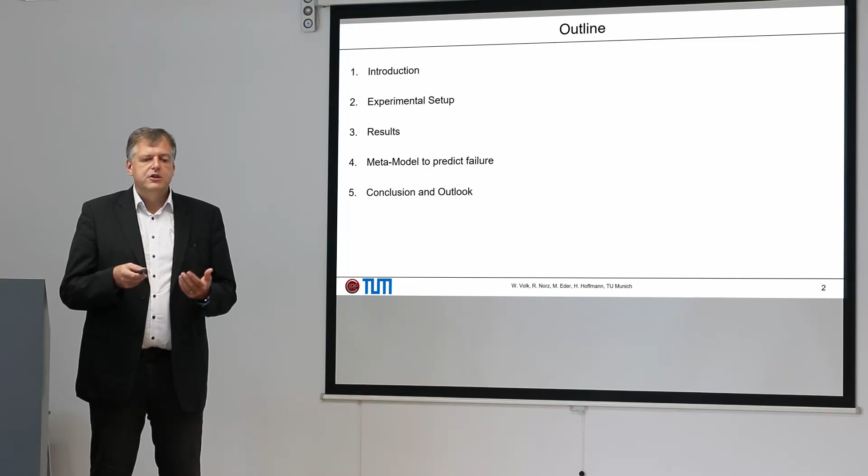Outline is as usual, starting with introduction. Then I want to present the experimental setup, give you some results, and then based on the results, a prediction model also taking into account anisotropy for the prediction of failure with non-proportional load path.

To warm up, we know non-proportional load paths are an important task in the prediction of sheet metal forming simulations. Based on a schematic view for a sidewall panel, we know that when we have ongoing operations like here to here, there can result a non-proportional load path. And we know it's not possible to predict this material behavior with a conventional linear FLC, and we need more complex models which are available.

There can be stress-based models, the EMFC, also our GFLC model, what was developed at our institute and I presented in CIRP Konferenz 2012.

So one topic which is not taken into account so far is the question of anisotropy. We know, based on change in the substructure of the material, that we have anisotropic behavior. We know that we have some different yield strength when changing the loading direction with respect to the rolling direction. So this is one of the main objectives of this work.

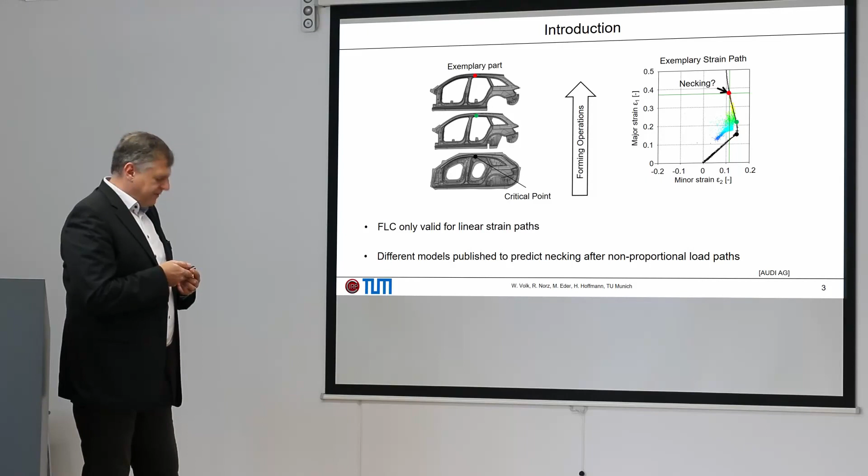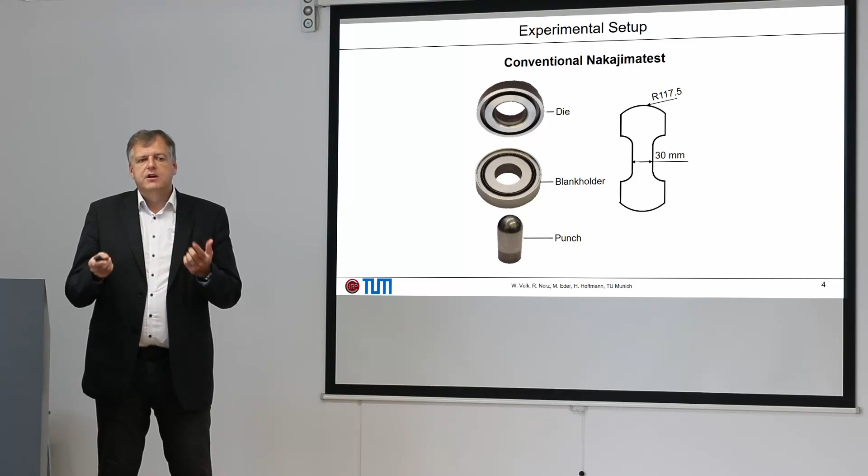Therefore, it's necessary to do some tests, and especially for the FLC, we start with the usual test equipment, this Nakajima test. So we have used the conventional Nakajima test with the die, blank holder, the spherical punch, and you know that it's possible to change the ratio of minor and major strain just by changing the size of the specimens.

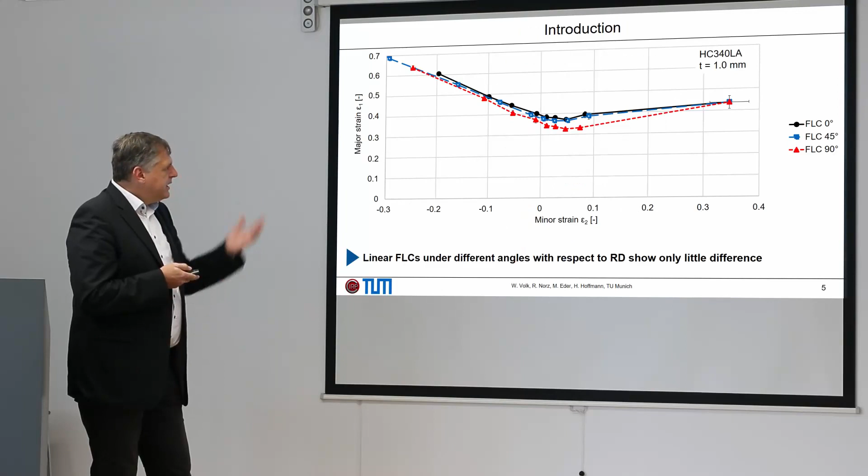Here, for our material, with this absolutely common steel material, a microalloy 340 steel, we know that we have some slight differences also for the FLC, the linear FLC, with respect to the rolling directions.

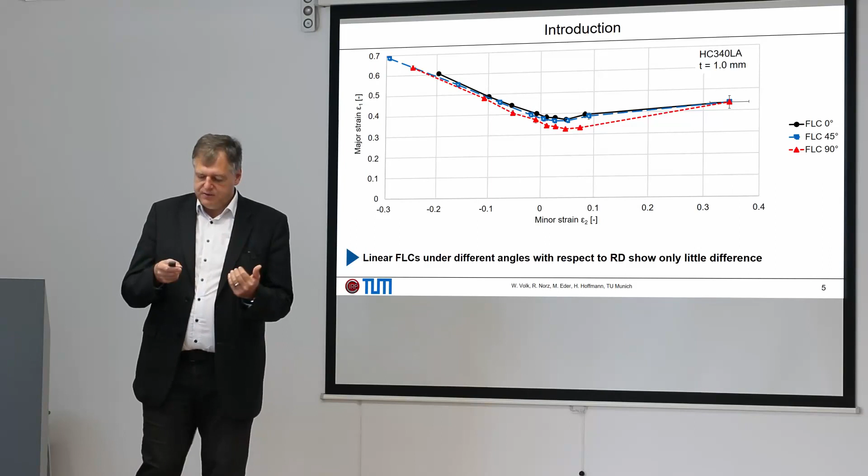Now, as I mentioned some minutes ago, our main goal is to describe the behavior when changing the loading direction within a non-proportional load path. There, it's necessary to have a suitable test equipment to realize this, and this is available at our institute.

It's an oversized Marciniak test, as you can see here, with big dimensions of 1,590 to 1,300 millimeters. And the dimensions are chosen so that even when we have uniaxial strain, it's possible to cut out secondary specimens where we can also totally change it with respect to the rolling direction. Here we see also the names for it.

We have an initial forming step and a post-forming step. And when there is now 0, 45, and 90 for simplicity, I just always mean with respect to the rolling direction. So IF0-PF45 means 0 degrees for the first step and 45 degrees with rolling direction for the second step.

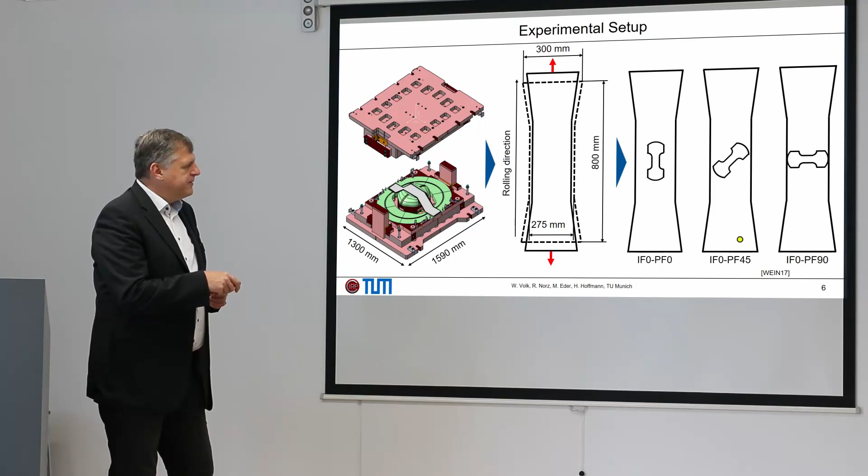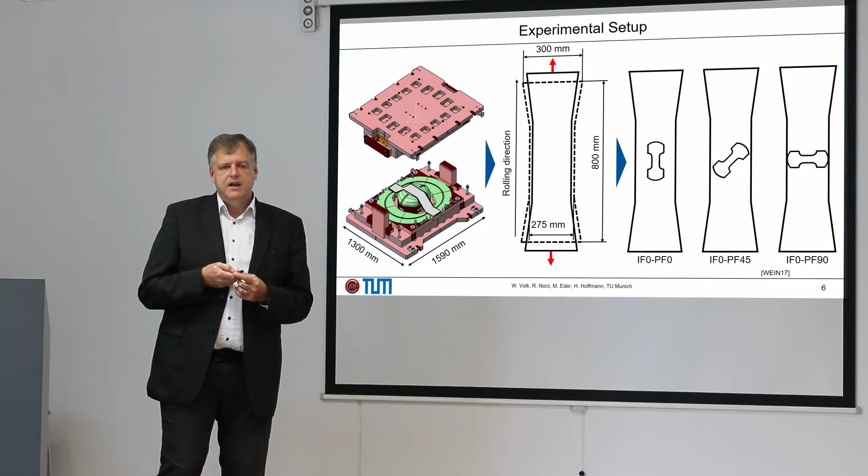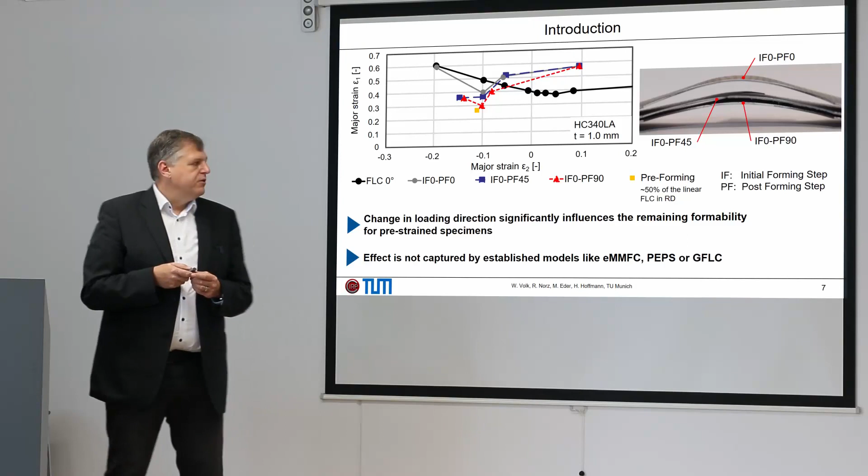So I want to summarize this as the fundamental motivation of the paper: a change in loading direction surprisingly led to a significant influence on the remaining formability for pre-strained specimens. And due to the fact that the stresses are probably the same, we can directly find out that this effect cannot be captured by established models which are published and used, like the eMMFC, PEPS, or also our phenomenological GFLC model. So now we go more in detail.

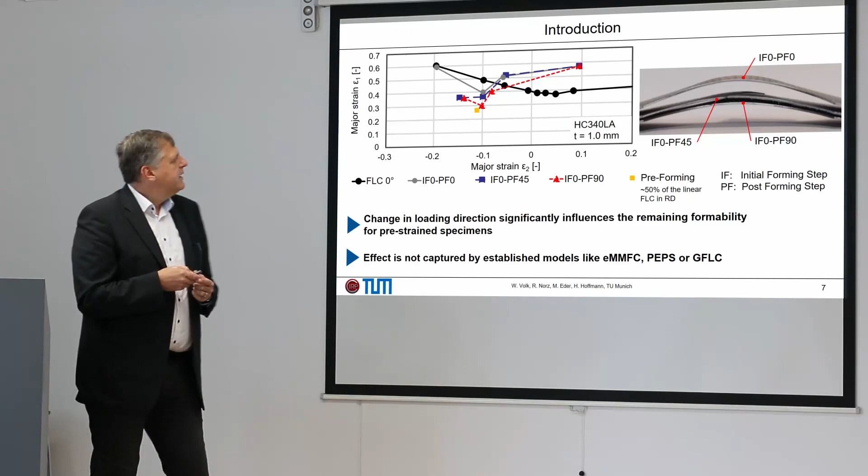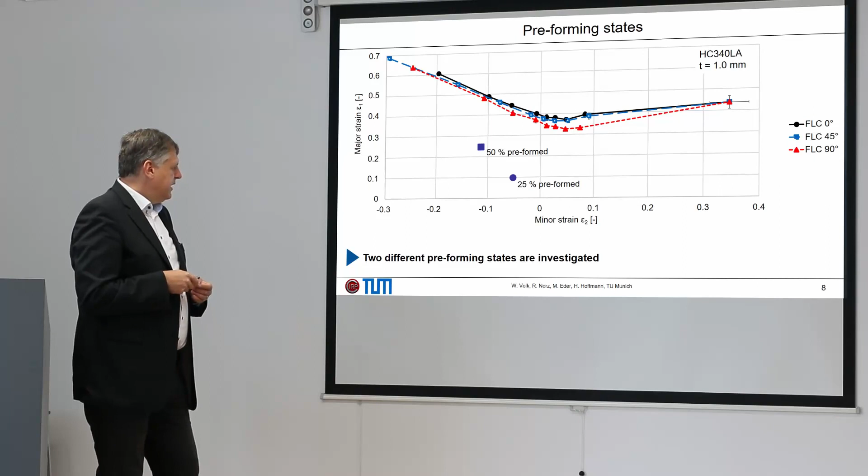For the analysis, we have seen here the 50% preformed, but also we wanted to prove how severe this effect is when we have a reduced amount of preforming, around 25% with respect to the FLC. So we have 2 different preforming states which are investigated in the following.

Here now we see the behavior with 50% uniaxial preformed specimen, 0-0 combination, so the classical one. We see the start of diffuse necking, and then we go to the plane strain behavior, where we know that with this point we have some microvoids which can occur because of the 3-dimensional strain state, and finally we have the start of localized necking starting out of the mid of the specimen. So this is well-known behavior.

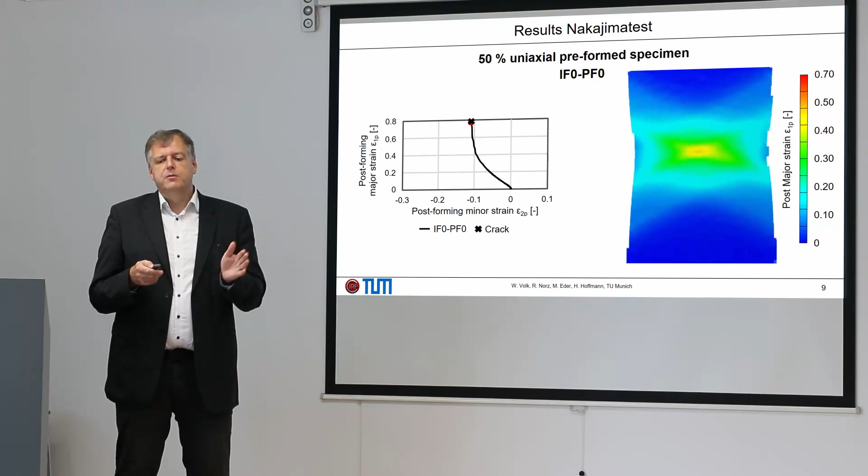And now let's compare with this significantly reduced formability in the 0-90 combination. It means 50% uniaxial preformed, and second step in 90 degrees. It's the red curve. You can directly see here that there is a big difference. When we have a view on the evolution...

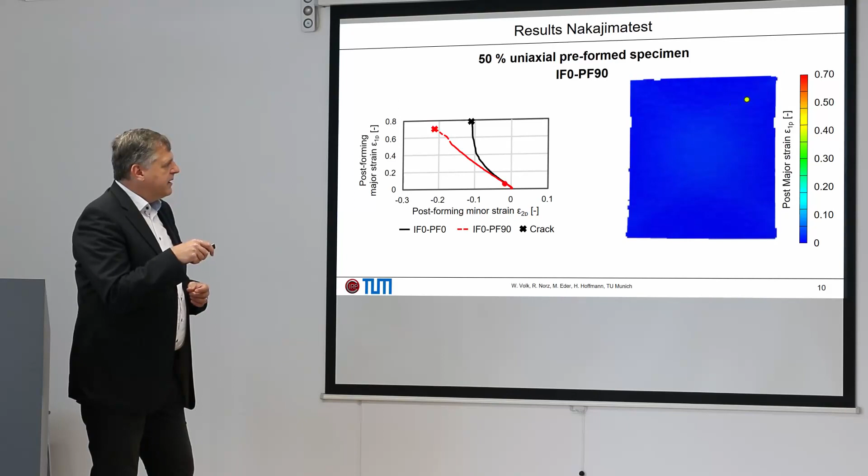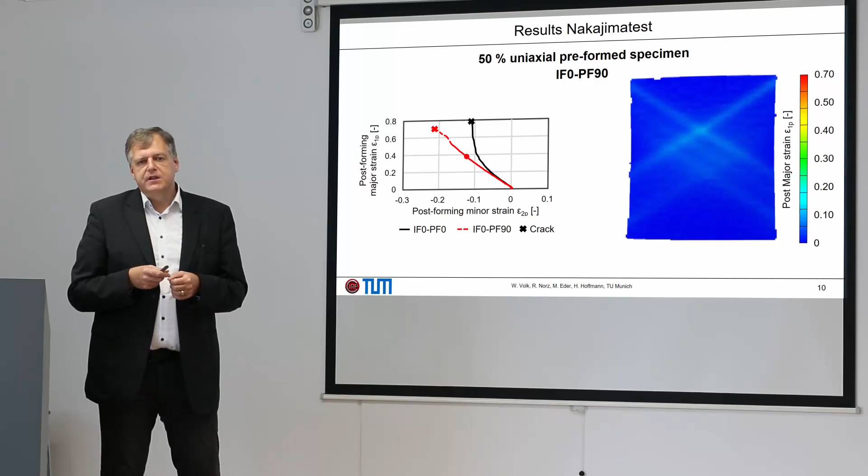We see here this surprising effect that we have some kind of localization in shear direction directly after start of the second forming step. So we see directly no change to plane strain, and like a smooth, ductile shear fracture. So also in comparison to the classical one, no start out of the specimen mid, and really a totally different strain behavior, a little bit comparable to materials with a negative strain rate sensitivity, which is here not the case.

Now, let's compare it also for the second group of specimen, where we have used a preforming step of only 25%. So with 25% preforming, we don't see this effect of shear localization. Always same behavior, start of diffuse necking and then localized necking out of the middle of the specimen.

And when having the big pre-strain of 50%, here also in 45 and 90 degrees, we have the totally different failure behavior. So in the following, we describe this classical one, change to plane strain with failure mode 1, and this ductile shear fracture with failure mode 2.

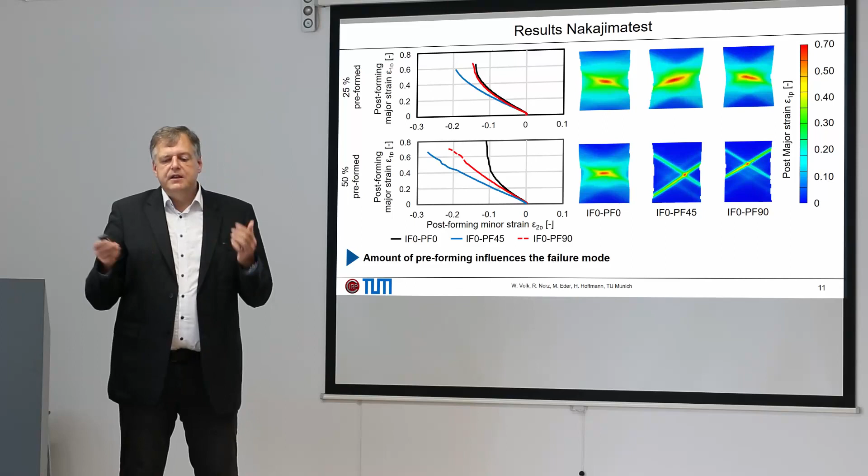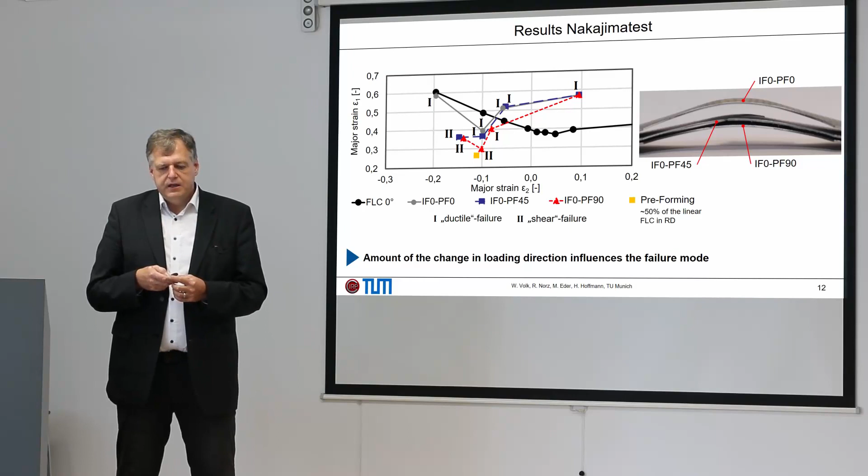Therefore, it's helpful to have a microscopic view in the specimen. And what is done now? Here we see for this 0,0 and the 90 combination, the strain path after the preforming step.

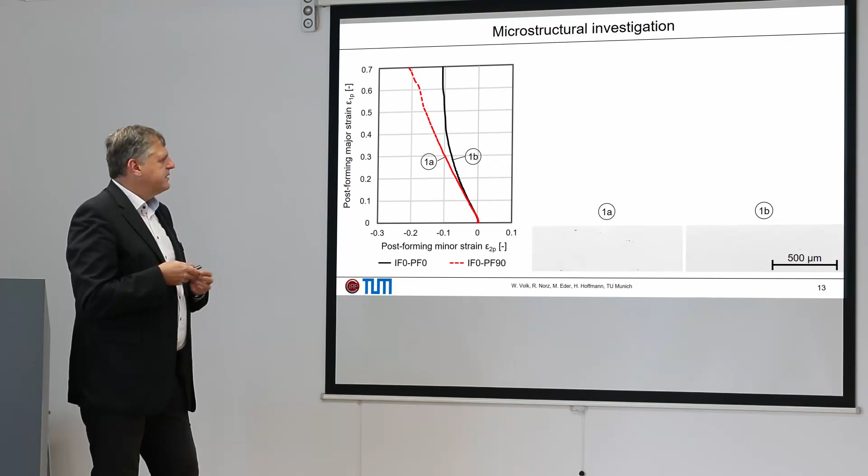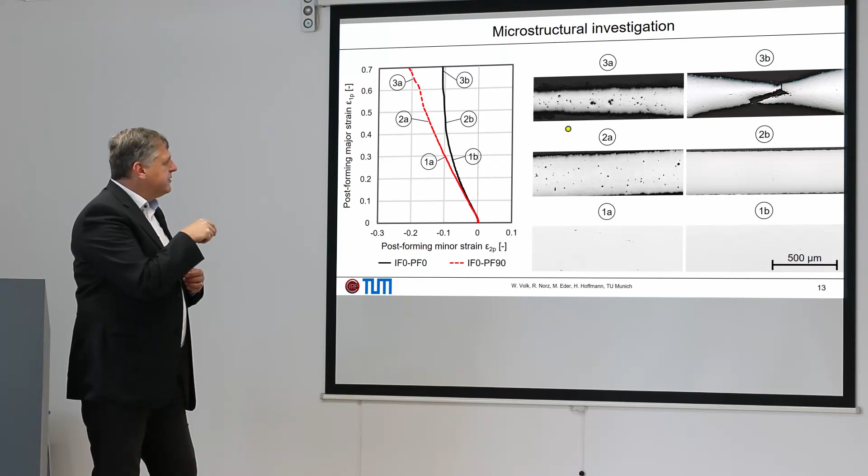So this is a moderate first start of strain. Then we have an ongoing intermediate step, and then finally where we have the failure of the specimen. Here on the right-hand side, conventional view 1B, 2B, 3B, we see nearly the homogeneous specimen. Then after start of diffuse necking, some small voids which can occur, and finally the crack starting out of the middle of the specimen in the well-known representation.

But now have the look on the second curve. Again, only difference, 0 degrees preform and just turn around and then the second forming step in 90 degrees. What we see, direct after start of the second forming step, we have voids which occur. That means the start of microvoids is here not caused by a three-dimensional stress state, just due to the texture development based on the preforming step.

And this, from our point of view, is the first time that we really can prove that this is an effect leading to different failure modes. Then we have the increase of this microvoiding and finally the fracture. And due to this enormous amount of voids, we don't have the skip into the plane strain behavior.

So let's summarize this. Even for this one-phase material, we have based on this texture development a start of microvoiding directly after change of the loading direction. Of course, now someone can say it's a bad material, it's not only a physical effect because we have inclusions of material or something like that.

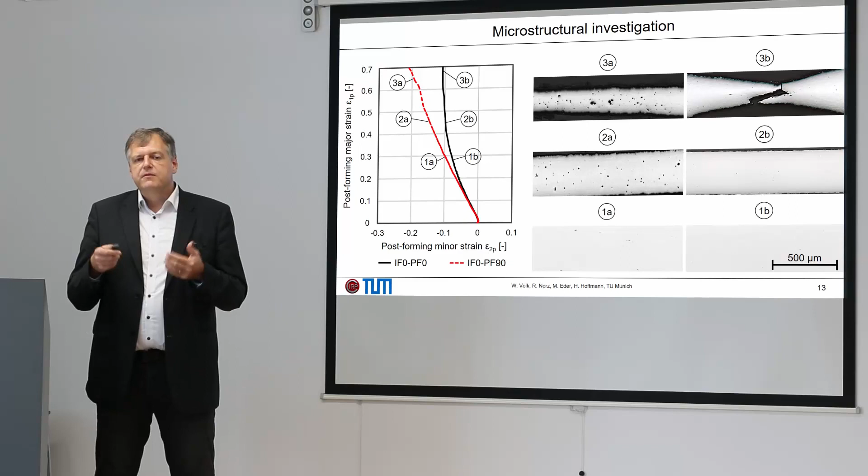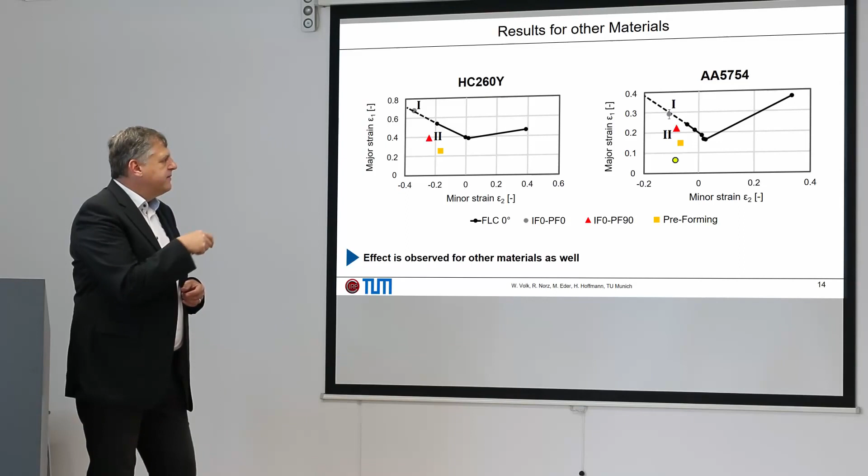To see if it's really a physical effect which can occur also for other materials, we used other materials. Here, for example, the IF steel 260, which is one of the purest materials we are using in sheet metal forming, or also for aluminum. And what you can see here, also for this interstitial free material or the aluminum, this effect occurs. So let's see, even after this large pre-strain, for different materials, this shear failure can occur.

As you can see here, it's important if you have forming stages with a big pre-forming and then a second forming step, that we take this into account for an accurate forming simulation. But how to do this? As we've seen, it's a texture effect. We could perhaps use crystal plasticity or other methods, but we know these are really expensive.

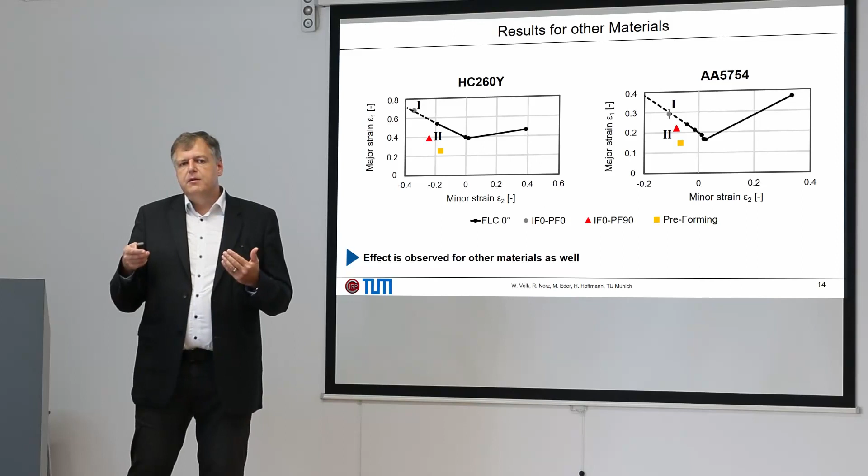So in this paper we tried to start with a well-known phenomenological description. Of course, we promoted the GFLC, which is a pure phenomenological model, and tried to extend this by taking these experiments into account. What is the idea of the GFLC, just to summarize?

The idea is you have to have a suitable amount of experiments. Here you see the preforming strain and the preforming direction - these are experiments which you can use with the Nakajima test. On all these points we do post-forming steps, for example experiments where we have a remaining FLC. The basic idea of the GFLC is just to interpolate this given information to any possible preforming combination of preforming length and preforming direction.

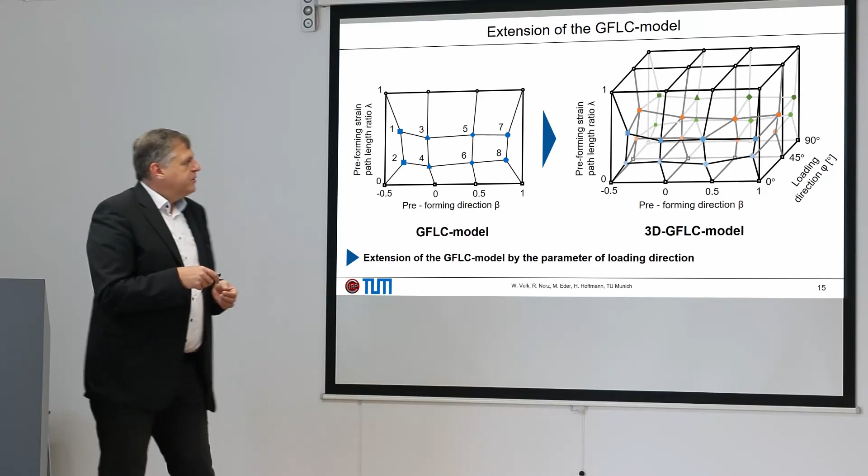But it's still isotropic. Now what we have to do is add anisotropic information within the framework of this phenomenological description. Inside the phenomenological model it's quite easy because you can add a second direction where we have the loading direction, or the change with respect to loading, respectively rolling direction. That means we have to do experiments on all these points.

Then it's possible to interpolate the remaining FLCs, measured on every point, just with the same approach functions as we used in the GFLC. So you do the experiments, use them within your phenomenological model, and now it's possible to predict arbitrary combinations of non-proportional and anisotropic material behavior. The next step, of course, is how to validate this.

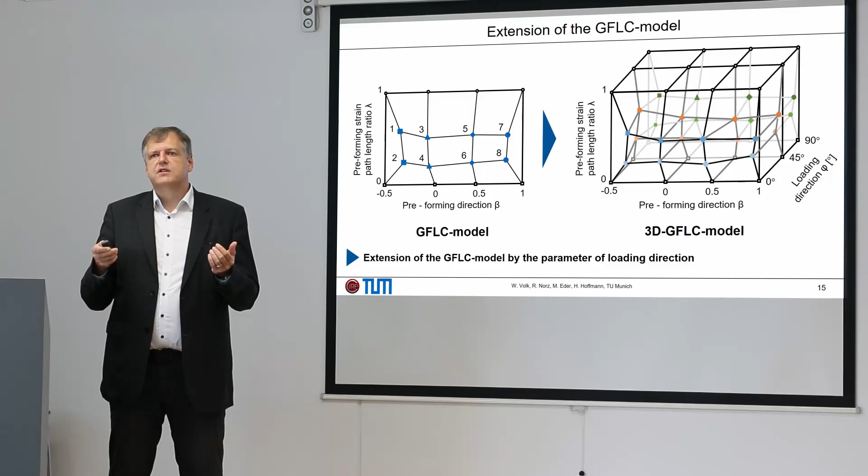When we want to validate this, we should have a boundary value problem which is more close to industrial applications. This is done in this paper with our so-called MUC test - similar to the Nakajima test, but we call it material under control, which is the combination MUC.

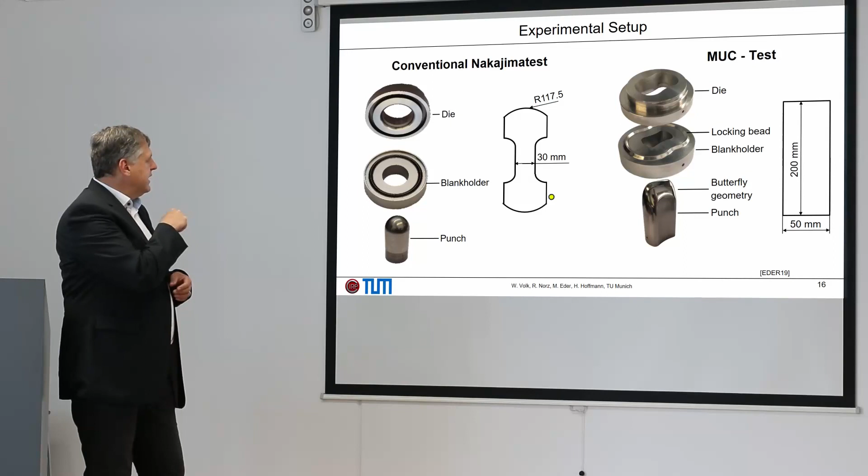The difference between the MUC test and the Nakajima test, as you can see here, is a changed binder - a so-called butterfly binder - and punch, with different radii and combinations of strains. With this boundary value problem it's possible to have a more complex strain distribution within the specimen compared to the conventional Nakajima test, which you can see here.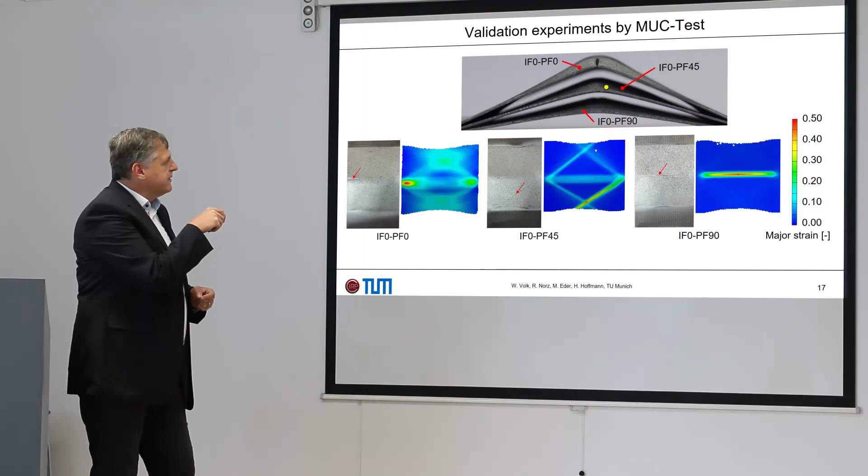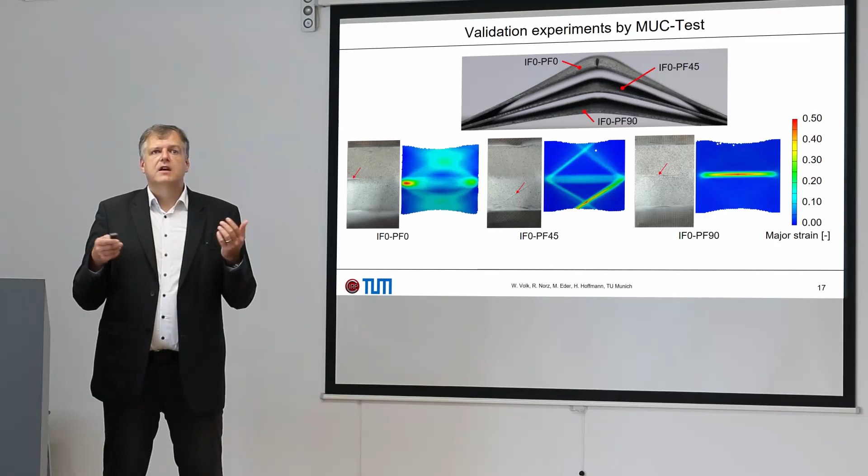So let's summarize this - also for this more industrial-oriented boundary value problem we see a big change in failure behavior, and also in reachable heights of the test when having the 0-90, 0-45, or 0-0 combination. Now let's use this information to validate our generalized anisotropic GFLC model, our 3D GFLC model.

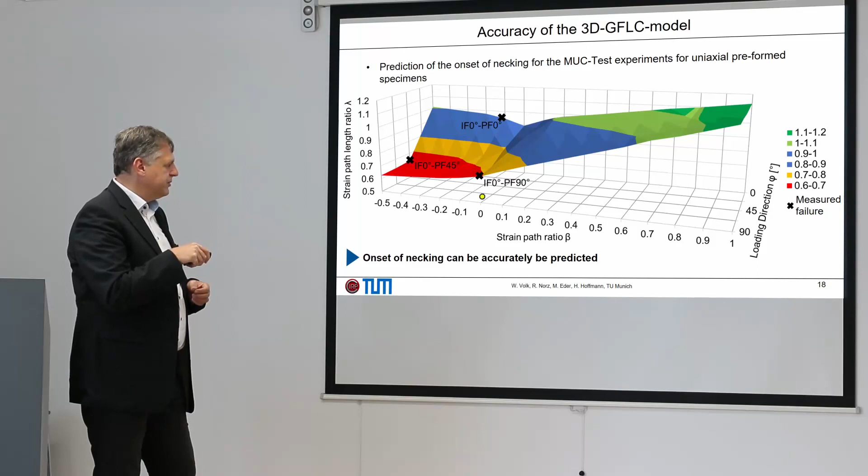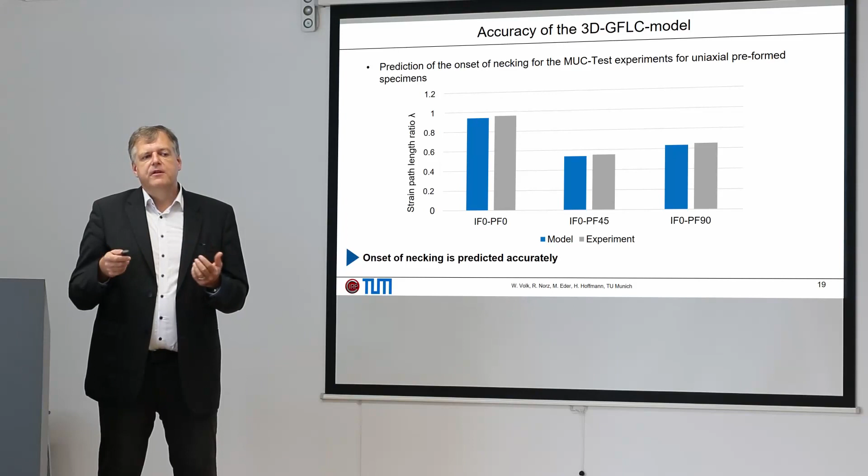Here you see the surface, which is based on the interpolation of the experiments, and here we have the points of the 0-45, 0-0, and 0-90 combinations. In this graph you can see what seems to be an accurate prediction. We can have a deeper look with a bar diagram, and here we see the model and the experiments show a very, very good prediction of the failure, even when we have these totally different failure modes.

So let's conclude our presentation. I want to summarize again that the change in loading direction significantly influences the remaining formability - change in loading with respect to rolling direction. What was really surprising is that different failure modes can be observed. Also, when we have a deeper look inside the material, surprising void growth, start of microvoids, and void growth based on the microstructural analysis is the reason we have these different failure modes. Within the framework of a phenomenological model, it's possible to predict this effect.

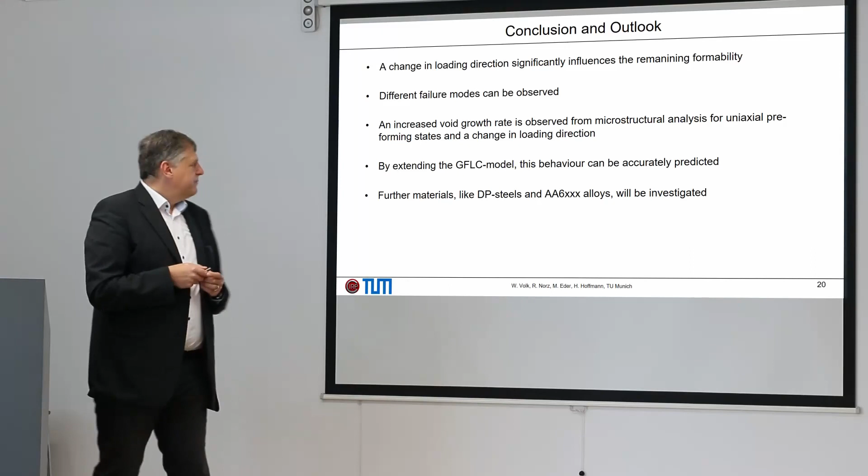And also, of course, we want to go on - further materials, DP steels, aluminums, and so on will be investigated to see how critical this effect is in a wider class of used materials. Therewith, thank you very much for your kind attention and looking forward to an interesting discussion.